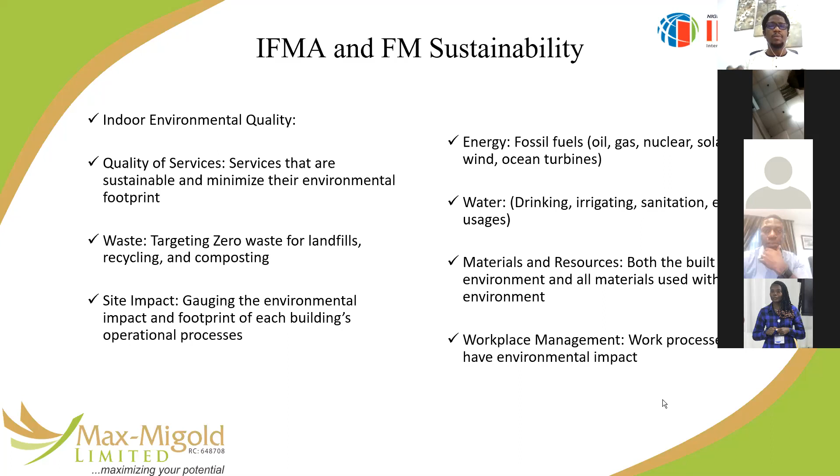So the kind of furniture, for example, how tightly packed our sitting arrangements to save money. Of course, we want to save money. Our use of things like paper instead of digital means of recording or keeping records and so on and so forth, as well as all the other things I have described.

IFMA sees these 8 categories as areas where FMs need to focus and create benchmarks on how you are impacting the environment in these 8 areas. And that's what we call sustainability reporting. So as FMs, as you advance in your career, you should be able to make some notes on how you are doing with regards to sustainability broken down into these 8 categories.

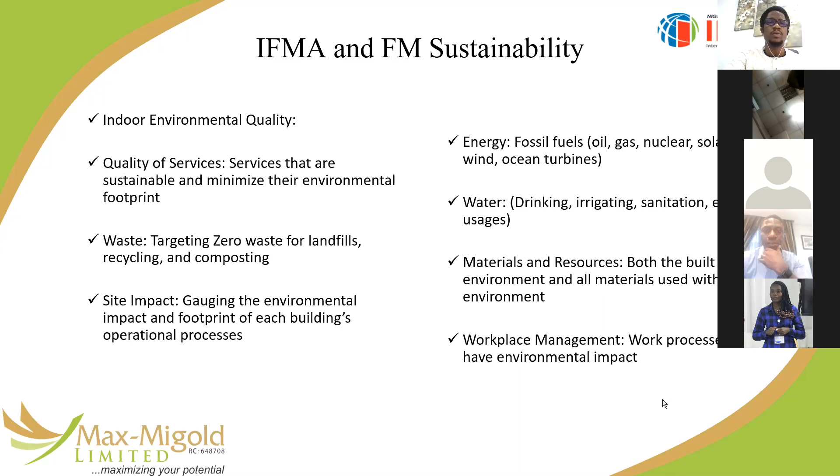So looking at the 8 categories and fixing it into the work that we do as facility managers, you can categorize them into inputs, processes, and outputs. Inputs are those things that we need from the earth. Processes are the things we deliver, the services and spaces. And outputs are the things that we dump back into the earth.

So energy, water, materials, and resources are the inputs we take from the earth, and we provide workplaces, indoor environment, and quality services for people to function and live comfortably. And then, of course, there will be the waste and site impact. That is what we are doing to the earth.

We need to consider sensibly using the inputs without waste, taking inputs and processing them in such a way that we will not only not be wasting, but also not be misusing or using them for functions that are not necessary, or even making people uncomfortable in the process of using the inputs, energy, water, materials, and resources.

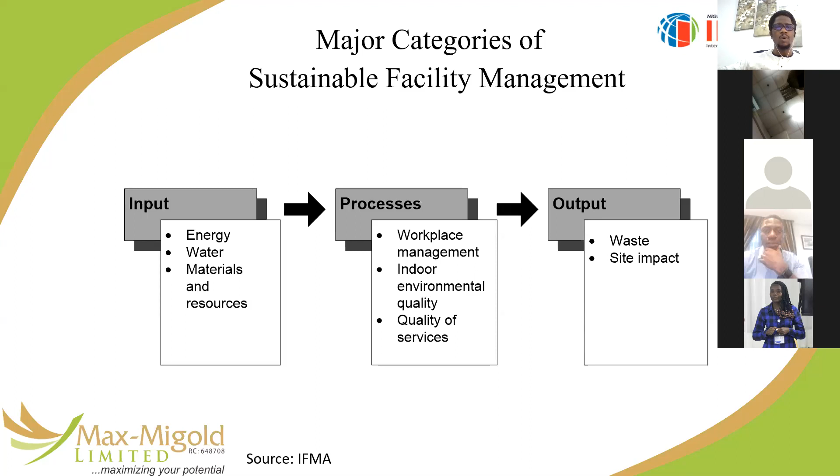And then when it's time for the waste, we want to minimize the waste, want to minimize the site impact. If we cannot totally eradicate it, we slow down how badly we do when it comes to impacting our environment in this process.

Businesses would typically focus on their profits, so what we call a top line and a bottom line. If you are selling or making revenue as a business, we say your top line, that's where we look at all the revenue you are getting. But your bottom line is what is left after you've taken away your expenses or your cost of goods sold or your direct cost or whatever cost that goes into that business.

So your bottom line is what you can describe as your gain, as your main output from the whole process. If I start a business, or you start a program or start doing anything, there's always that view of what will be the main impact, what will be the main results from this effort or this endeavor. That's the bottom line.

And for so many years, the world has looked at business purely from a parochial view of capital, economics, funds, finance, money as the one and only bottom line. It's gotten so bad that even so-called non-profit organizations have taken the surplus mentality from the financial or economic standpoint to the level where nothing else matters.

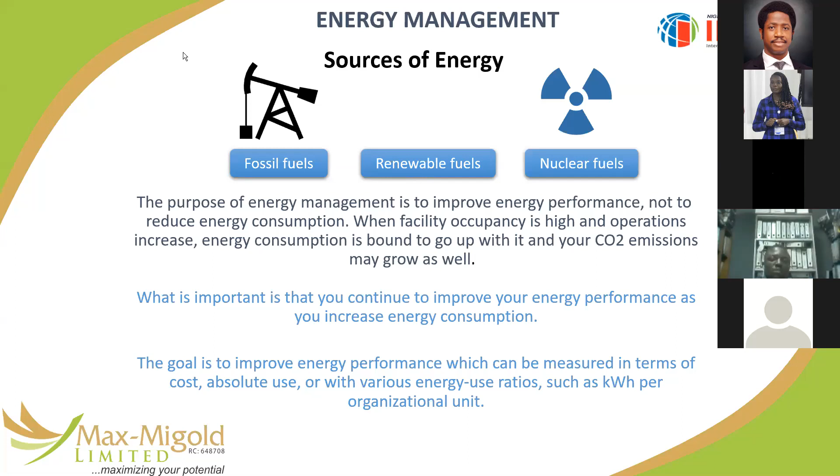Okay, so let's talk energy. We can all relate with the sources. The fossil fuels are the ones that are tapped from the earth, fossil because they've been accumulated through thousands of years of decay. So we have coal, we have crude, we have gas, we have bitumen, and so many other natural resources that come from this source.

We have the renewable ones - they come mostly from vegetation or vegetable materials, or from water or other sources that don't necessarily get used up, or when they are used up, can come back replenished as quickly as possible. And then you have nuclear, which is a continuous chain reaction process that generates energy in a very delicately balanced or controlled environment.

And then, of course, we have the perpetual, which is solar. Most of the time we add solar energy into renewable because of the storage systems that solar power management systems normally go through - you have to have battery banks and other inputs. But in essence, when it comes to the power of the sun, you can call that perpetual because it never gets diminished. No matter how much you use the sun, you always have enough. It doesn't ever go down, right?

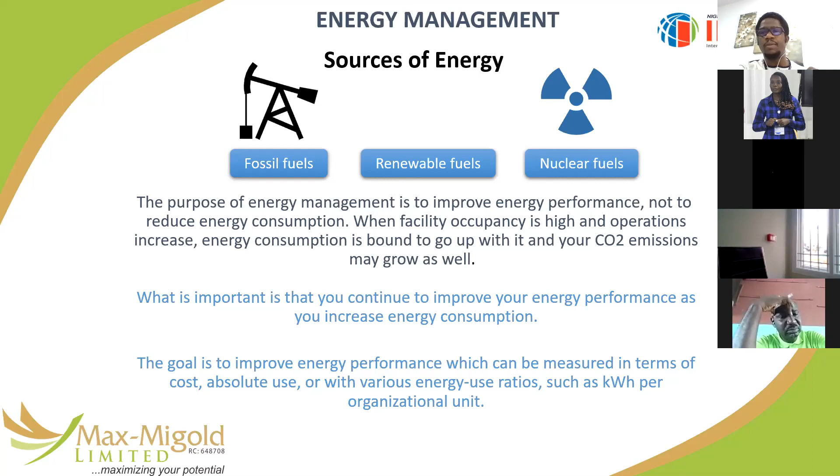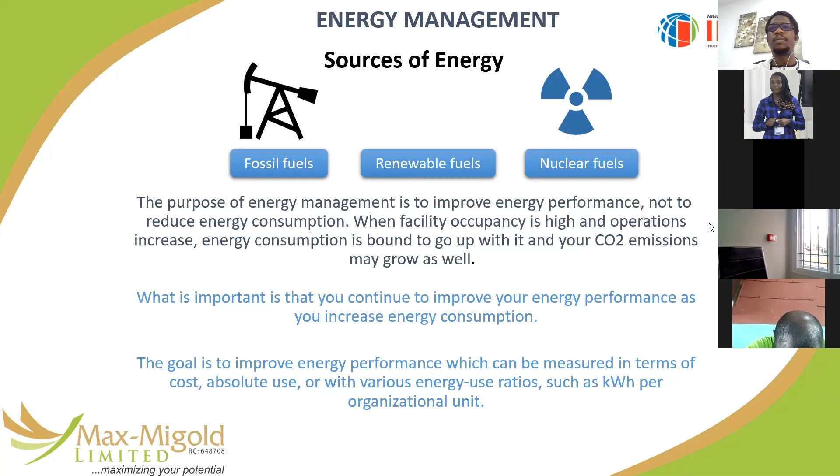But as facility managers, our main concern is not on total energy consumed, but on what we call energy performance, or the rate at which energy is consumed per output. A square meter could be an output because it's a measure of how much you're managing - a person who works or lives in your space, a student in your school, or a product being produced in a factory you're providing power for. You must focus on how the energy used relates to a unit of output. That's energy performance. So your total can go up, but your energy performance must improve. You must keep seeing the energy use per output measure, or energy use driver, going down. Whatever ratio you're using to measure your metric, it must be going down. Your total can go up, but your average or per-use should be going down.

What are your goals, facility managers? You want to use less energy per output. You want to use more from renewable sources. You want to use energy in a more socially and environmentally responsible manner. You want to understand as a facility manager how energy is consumed in your facility, how much you pay per kilowatt hour, whether you're on maximum demand and how that's calculated. You must have an idea of your energy consumption pattern, your energy profile.

So I would normally recommend you ensure that you do regular energy audits for your facility. That's one of the major services provided by Max-Migold across the country today - helping you identify in a simple process where every bit of energy you're paying for goes, developing your energy use profile, and identifying waste opportunities for savings that can go straight into your bottom line.

So ensure that your core building systems are improved in efficiency. What does this mean? Many people don't realize that just by having a cracked window, or a window not closing properly in one room served by a 2 horsepower air conditioner, you can be wasting up to 25% more energy, because that AC is trying to balance temperature when there's a lot of mixing between hot air outside and the supposedly cold air inside.

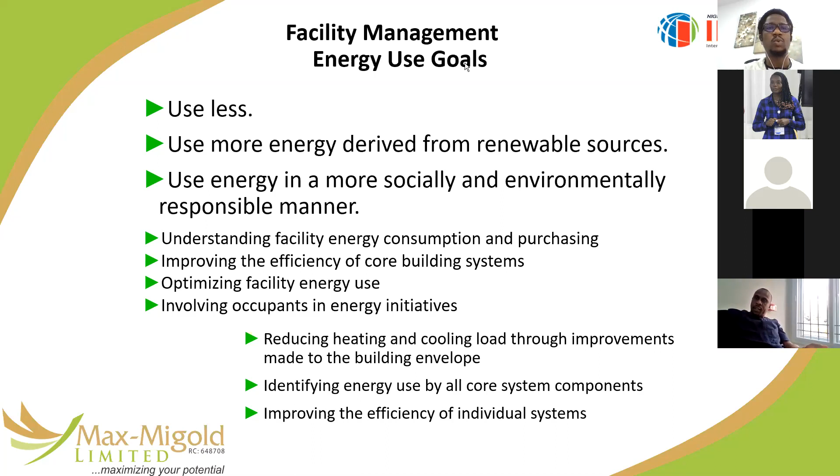You need to get people committed to it, to the point where they will learn to unplug their own laptops when fully charged, not leave it continuously on power, or leave phone chargers on sockets whether there's a phone on it or not. You educate, you orient, and so on. Because if they're not carried along, you'll be wasting so much and won't know exactly how to get around the issues you are dealing with.

In your facility, energy loss is often hidden. When you are paying the bill at the end of the month, that's all you see—the bill, and they show you the kilowatts you consumed. You really can't tell exactly where that kilowatt was used.

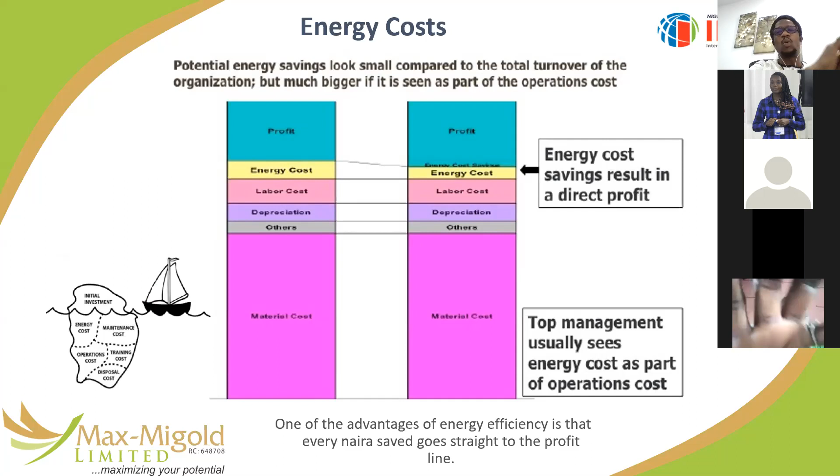And that's why we encourage that we do not just use main metering, but sub-metering and circuit level metering. Having data at three levels at least in your facility will give you a lot of information that you can use to make decisions, and then carry out energy audits.

I talked about this, a service we provide. But as a facility manager, if you just do your inspections with focus on a certain area—electrical inspections today, cleaning inspections tomorrow, health and safety inspection the next day—on one of those inspections, generate simple templates you can download from the internet to record your observations.

For example, you have lights. Maybe you have lights that are not energy efficient. How many of them are energy efficient compared to non-energy efficient? How bright are your spaces? How effective is the light you are providing? Some spaces are too bright for the purpose of that space itself. So do that audit—how many of those lights are heating up?

Every time you're supposed to have lights and all you're feeling is heat, you are wasting energy, because it's not heat—you didn't put the light there to heat up the room, you put it there to provide light. But the fact that you are feeling heat means energy is being converted to heat, and that energy is paying to heat a space that you are actually providing air conditioning to cool. Is that not an irony?

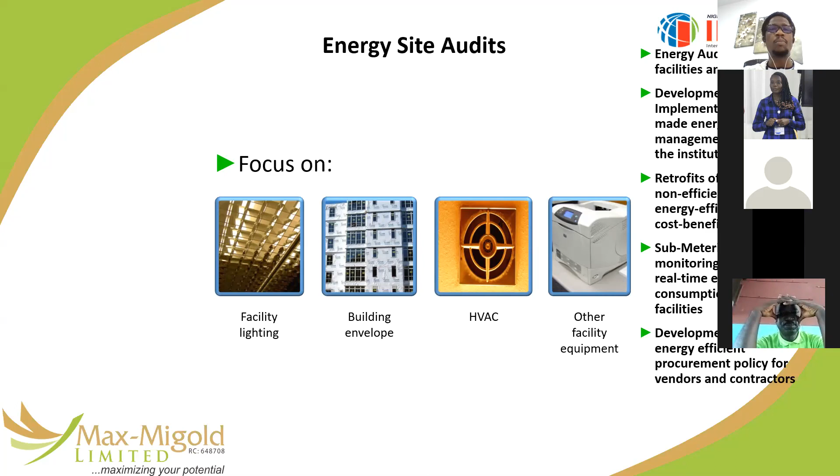Auditing is one key way, looking through all the systems and building fabric, and then metering and sub-metering, like I explained before, are other ways we can ensure we have energy data we can act on. If people put things on and leave them on before you come around, you don't know they were on. But if you have digital meters that are IoT sensor enabled, picking up this data and giving you visibility anywhere you are, you will not go wrong at all.

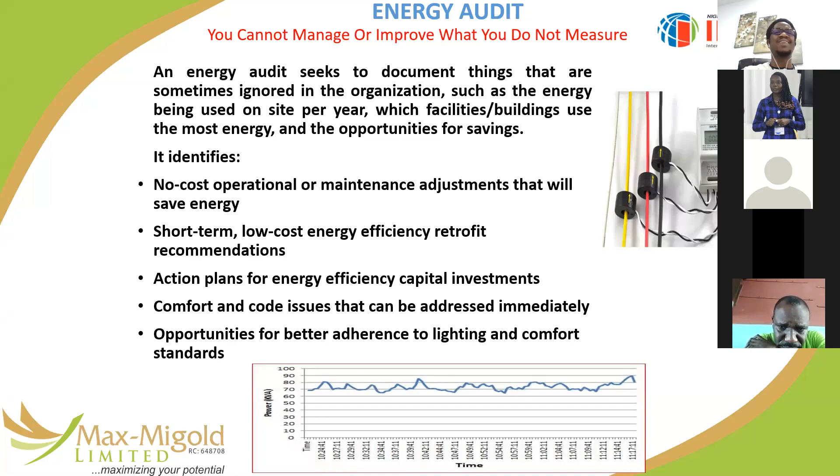One of the things we're going to introduce to you at some point in this program is how you can use the Eniscope energy management system, which we also bring out from the UK, to help you monitor at a micro level, per second, per minute consumption, per circuit. It's phenomenal. If you think about your energy cost today, calculate 10 to 15% of it. Metering at the circuit level can already save you that amount without any other retrofit or investment. So that's something you can think about.

In shedding, you basically kill some activities that are non-value adding. You don't move them around. For example, when people are on break, tell them to leave the office and shut down the air conditioning so they can do two things: stretch their legs, be healthier, and you save energy and reduce consumption at peak. Your bill will drop drastically.

Then load shifting. There are some things that can be done at non-peak periods that are actually happening at peak period because we have automated them. Your sewage plant is on automatic. When the sewage builds up to a certain quantity, the plant picks up. And you know that quantity will be reached easily when the office is occupied, or when the school is occupied, or when the church is fully occupied. So why, at that time when all the laptops and other equipment are connected, should the sewage plant work?

No, I will switch that from an automatic pickup at a certain level to a pickup at a certain time. So I will tell the system, treat between 4 p.m. to 7 p.m., and in the morning, treat again so the whole chamber is empty for the day's collection. But of course, I would have done my analysis to know that my daily production of waste does not exceed my capacity to hold until off-peak, because it doesn't make sense for that machine to come on at that time, or for pumping machines that fill a tank used by gravity to be pumping at the same time all the equipment in the facility are on.

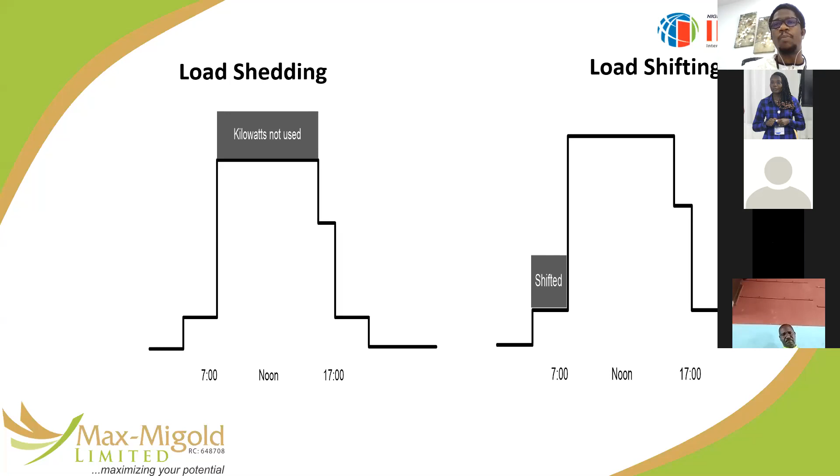We don't really know what's making our bills go up because we're not checking, we're not doing any of this analysis. And then look at all of the big macro, small micro energy waste.

For the macro, we talked about the building systems, we talked about your building fabric. These things have system reviews that look at the entire building.

But again, the micro ones are those small things like laptops being left on, chargers being left on, TVs put on standby and left on standby, decoders and the rest. If you're not going to use them for weeks, days or hours, put them off, let them go to sleep completely, let them die off, and when you need them, put them back on. Don't leave them idling. I know some people have never put off their laptop for months or years.

They just close it, and it trickles out, losing 20-30% before the next morning. They continue charging it again all day, and they just do that, and you just keep losing. So those are the micro and macro ones.

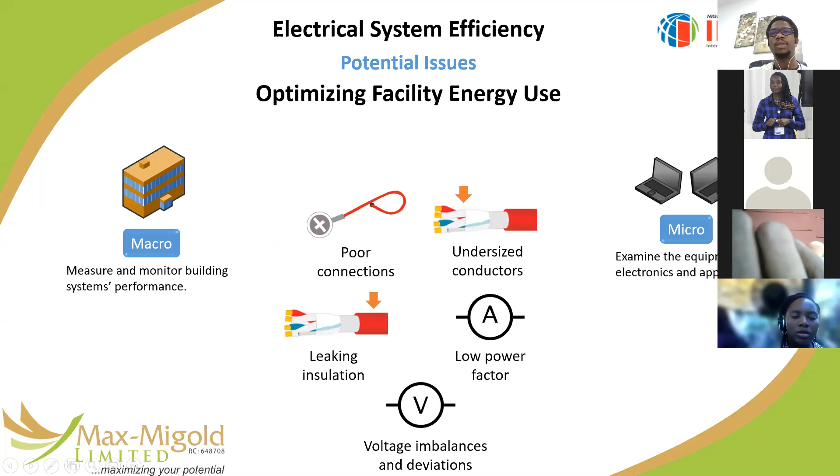But then there are the maintenance-related issues, where your equipment keeps drawing power to keep feeding or serving you. So if you have poor connections, undersized conductors or cables, leaking insulation, low power factor, or voltage imbalances, you are actually losing a lot of power. Your calculations will just be going on, and you won't know that you're not getting optimal use from your bills.

For example, if the public supply feeds you 240 or 250 or 260 volts, your bill will be substantially higher than if that consumption came at 220 volts. But if you're not measuring, you don't even know that you're wasting money, because how would they calculate it? They just multiply it by the factor and give you your bill.

That's what the meter does. Okay, so let's be careful. Sub-metering is very important, because you cannot measure, you cannot manage what you cannot measure. You cannot manage what you don't know.

That's why you cannot just wait for your bill to arrive at the end of every month to see. People take their bill to management meetings and start philosophizing on how to reduce energy, how to save energy. You're just talking theories until you can actually pinpoint the things that are actually costing you.

I've seen solutions where there's a lineup of items of savings opportunities, and next month the bill goes even higher, despite all the effort. You know why? They're not even checking, they don't know.

Okay, when you have a large pump automatically filling up a tank, and there's a plumbing burst in one of the major pipes emptying the tank every 2 hours, that pump keeps coming on every time the tank goes down, and nobody is checking because the drainage is sealed and the water is just going off. The pump works itself into overdrive and eventually goes bad, but between now and then, see the energy consumed. If you have metered that pump and have insight into what it's doing, you get a sense of, oh goodness, why is this pump virtually running around the clock?

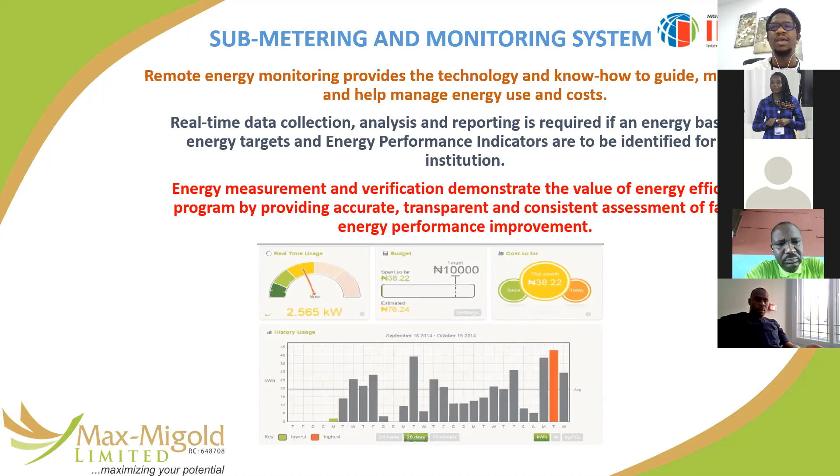So let's be careful to make a case for proper metering, so that we can have ideas or information on how our facilities are doing.

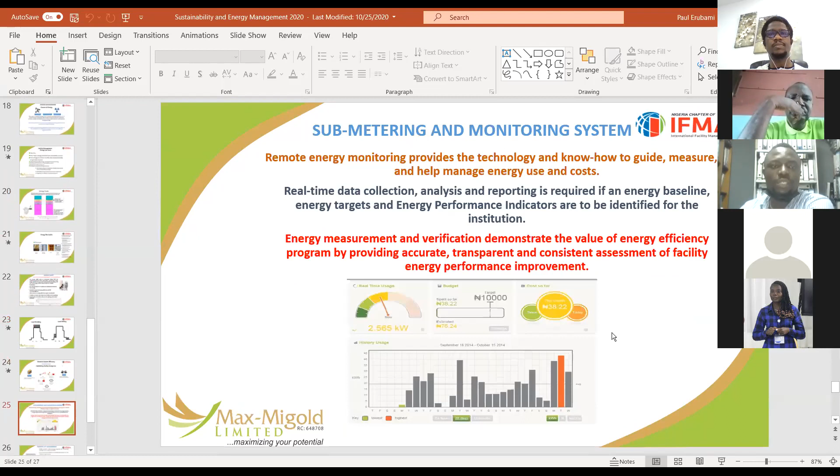Thank you for the lecture sir. You talked about voltage imbalancing. In a situation whereby we manage a multi-tenanted building, even on your generator, when you're on your generator, you still have voltage imbalancing. What can someone do about it to stabilize it?

There are devices that do this - there are power correcting devices. That's what I would normally advise.

Then the second thing is, when you have a three-phase connection, distribute the loads. Most of the time the problem comes out of three-phase connections feeding single-phase loads. So, distribute the loads. For example, you may have 24 circuits or fuses in the distribution board, and all of those fuses are single phase, right?

They're all rated differently, and they carry different sizes of appliances or equipment. As you feed your three-phase load into that DB, you are not feeding three-phase into each one, you are feeding single-phase into each one. So you need to do a study of how that load is being carried by the three phases so that you can balance it.

You probably have a 60 amp fuse, 4 of them on one phase, and then you have 5 amp fuses for sockets, like 5 ten-ton or 5-ton standalone ACs connected to one phase, all single phase connections. And then you have all the lights connected to another phase. You've already created an imbalance by the way you put your loads into those 3 phases.

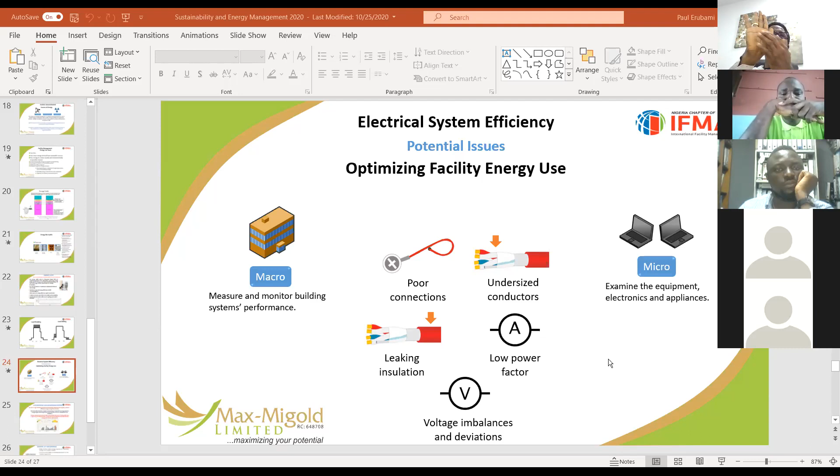Okay, you need to meter every circuit. It's called sub-metering, or energy management system. These are very, very simple devices - a small device. If you have your distribution board like this, I'll put a small device beside your distribution board. It's a computer.

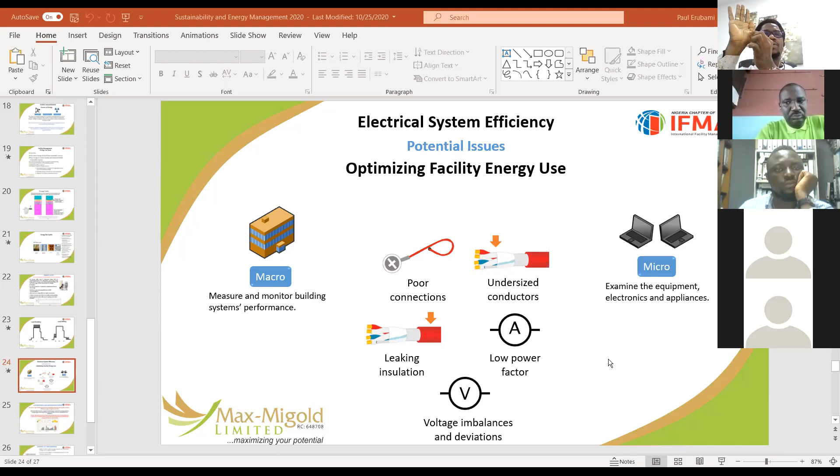In your distribution board, you have all of those fuses - one is for AC, lights, sockets, UPS, all of those things. They've arranged them inside the DB. If I put this small computer on the side here, I will just hang current transformers, little ones that look like this. You see this image?

See this image? What I'm describing is not a meter like this, it's a small box. I'll drop a brochure for you guys on the platform so you can look at it and get an idea of what I'm talking about.

What this is doing basically is picking the data of what's happening inside this cable and sending it to your phone and laptop. So 24 hours round the clock, you can disaggregate every minute of energy used across the entire facility. If you have that in place, you can tell management we don't have a kilowatt hour being lost.

For example, you probably don't know that people who stay back to work in the office are staying in about 20-30 rooms, which are kept cooled and lighted for extra 2-3 hours. If you know how much energy that 2 hours is costing, you can move 20 of them into one room once we close, shut down the whole office, and say this is our hot desk where everyone that wants to work late can come to. I can use that to save 19 rooms of energy use.